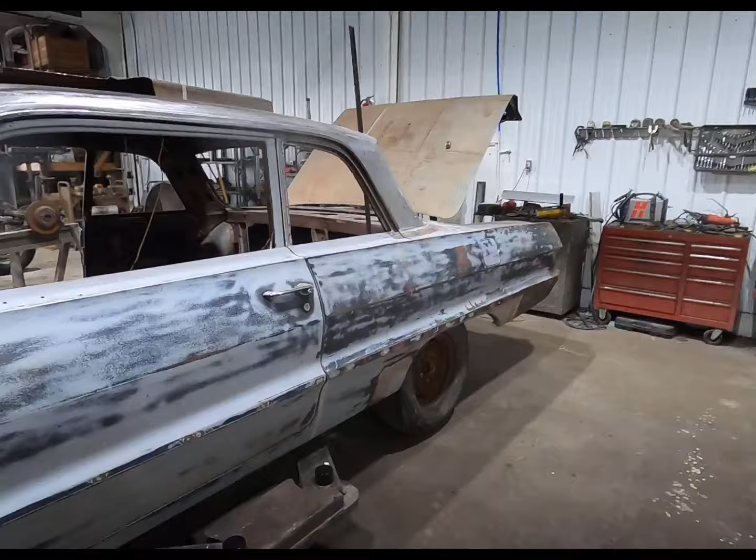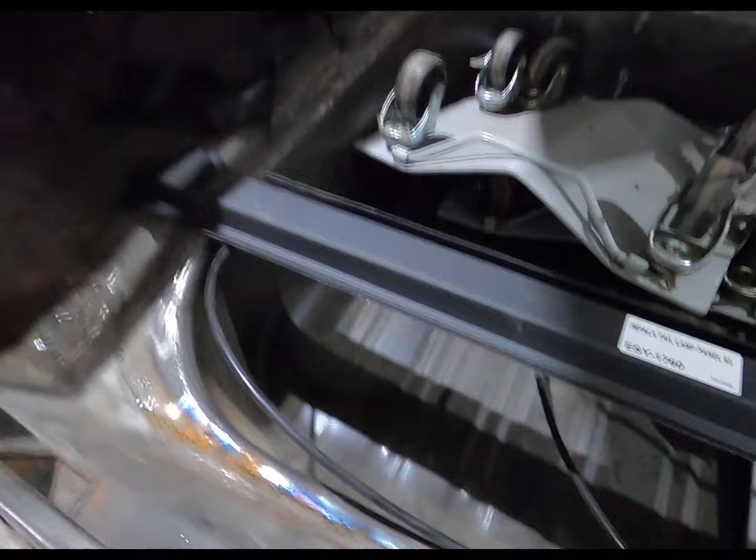I'm gonna get this back panel taken care of. This panel actually don't look that bad, and that's what he bought. It's the other part that's bad, the part it attaches to. So I'm gonna get that out of the way and make a new panel for across there. It's all beat up and does have rust, so it needs replaced, but the worst part is the panel that goes underneath of it.

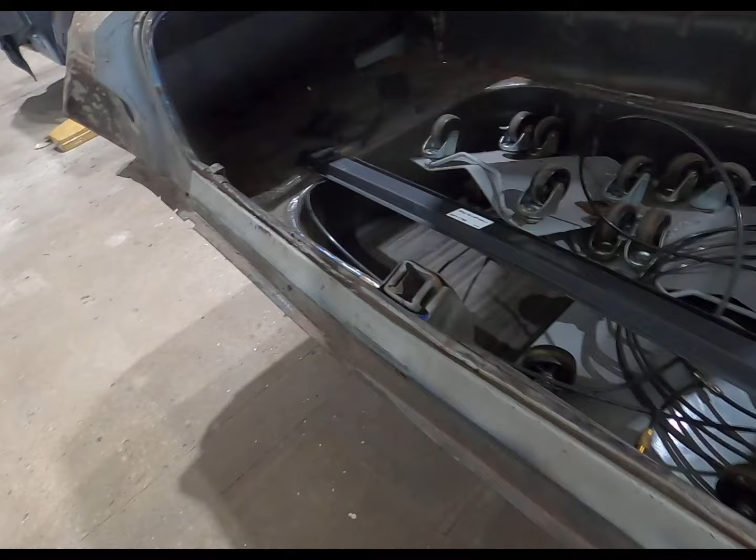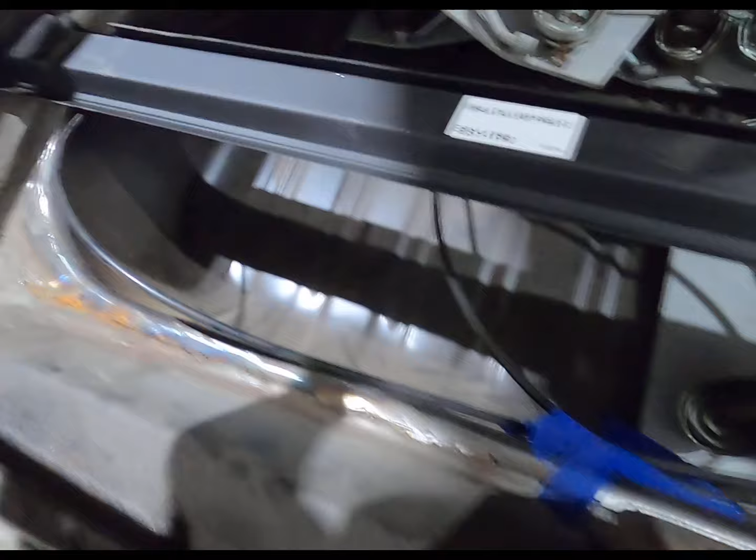I'm gonna get my cutoff wheel and everything set up and start cutting here. First, this panel comes down underneath and it's spot welded on both sides. I'm gonna get those spot welds knocked off and get this out of the way. This ain't attached to the bottom at all, so I'll leave it where it's at. Do the same thing on this side, cut it, get it out of the way, then cut across and get this over so I can see how that panel's made up in there.

All right, I'm going to mark this where I measure, 33 1/4 to this side. That way I can double check it after I go back in.

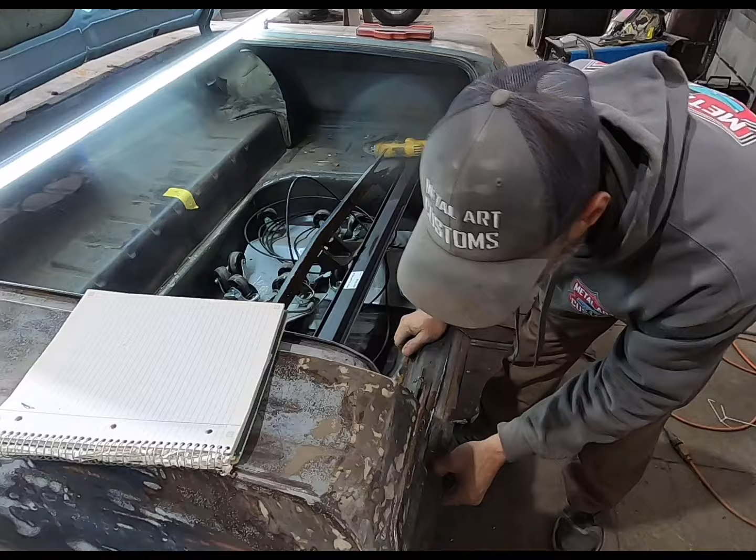All right, let's mark the ends. See, I really don't need to replace all this, it's just right here. So to make it easy, I can cut that loose right there.

To make it easy on me, I can take this out right here and weld across the top. Now what did I do with my pencil? There it is. Okay, right there.

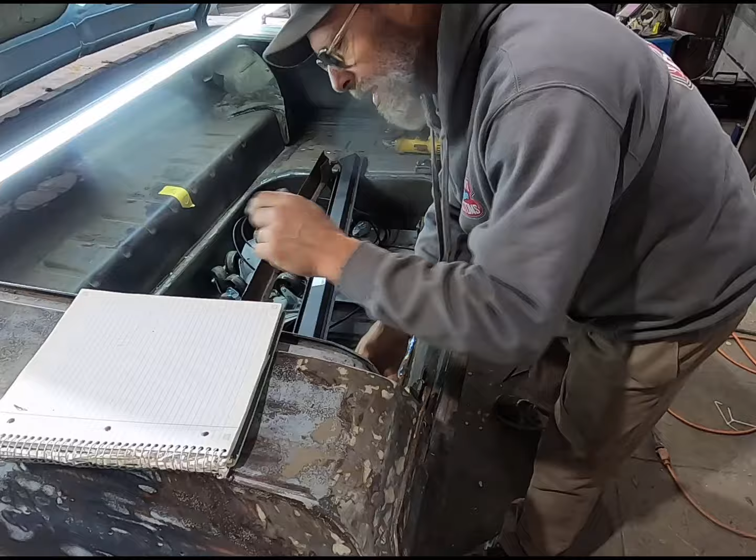If I come up here, right there's the end of my piece I'm replacing. Get this out of the way. I can stay, I don't know, about that far back and just cut all the way across and get this piece out of here.

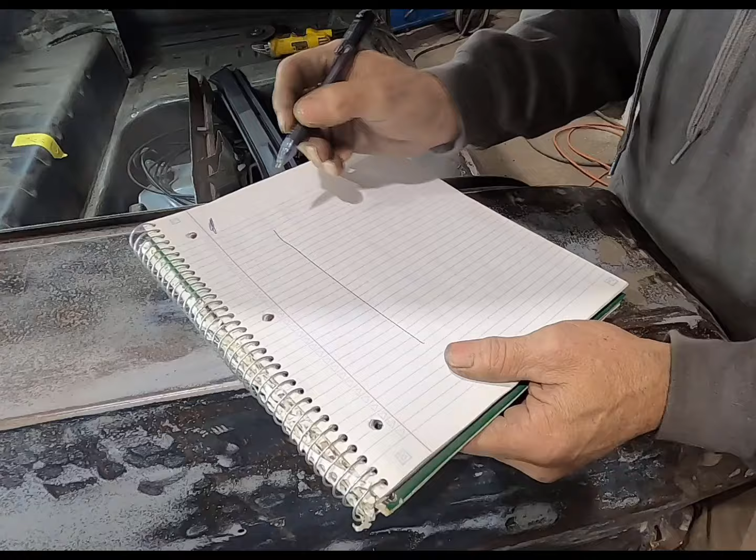But before I do that, I need to get a measurement here and a measurement there. So that piece comes across, taper out. At this end to that bend, I need 1 inch. At this end to that bend, I need 1 3/4.

Okay, and let's see, we got three-eighths. And to come all the way out here, we got 2 inches there. Okay, 2 inches. And then from that cut to that cut, 28 inches.

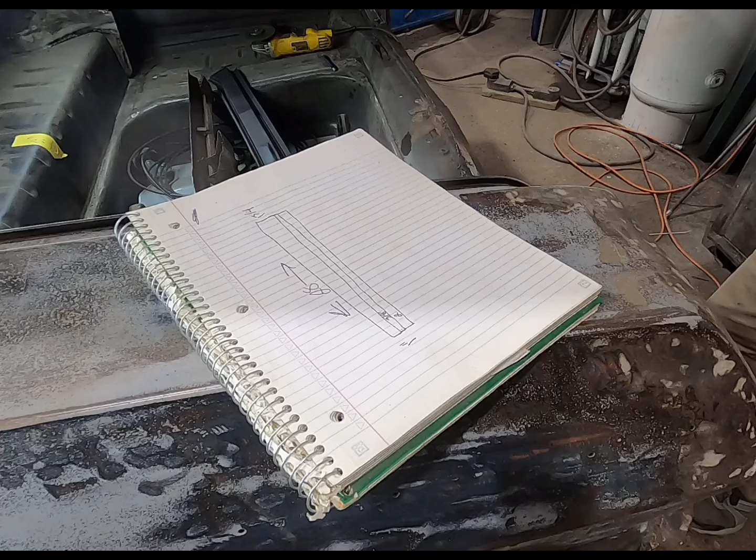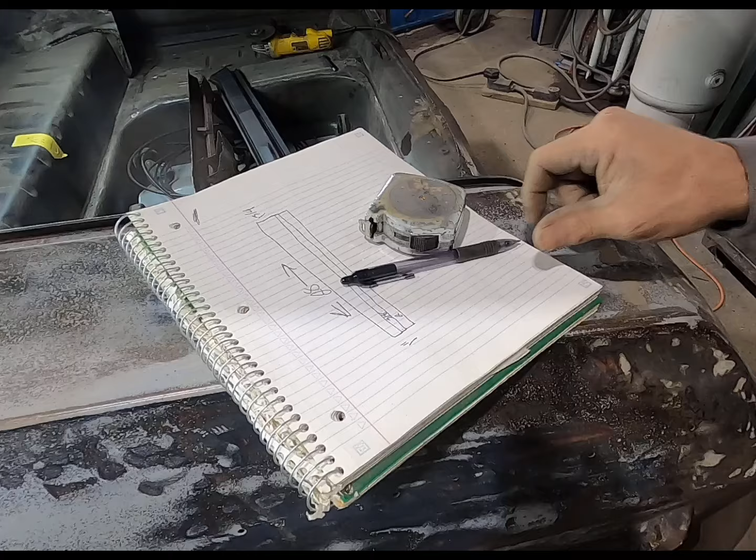All right, I'll get a blank cut out. So my blank on this end, I need 3 3/8. On this end, I need 2, 3, 3 3/4, 4 1/8, by 28.

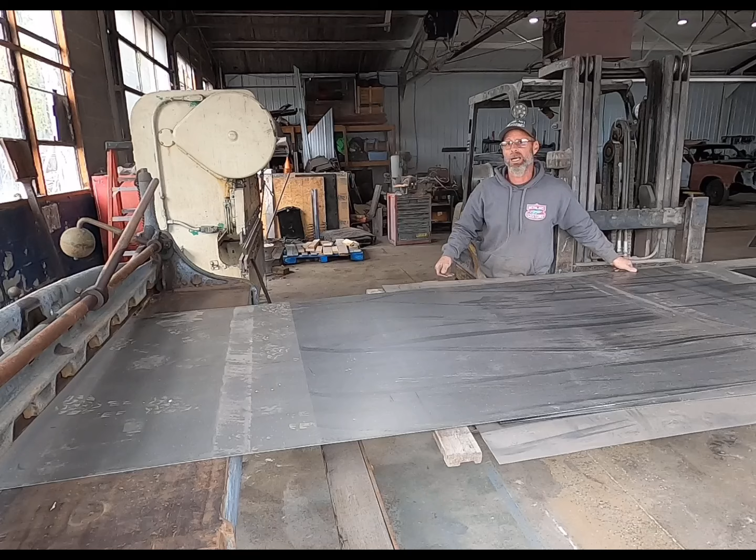Make sure it's flat against the backstop, like so. Lock it down. It might be easier if I stomp it from over there.

I don't like how this pedal tapers and you can only step on it in the middle. I'll probably change that if I don't make it hydraulic. I'll probably make it hydraulic. I'm not up for all that.

Could you imagine doing a lot of labor like that? Yeah, I don't think so, Tim.

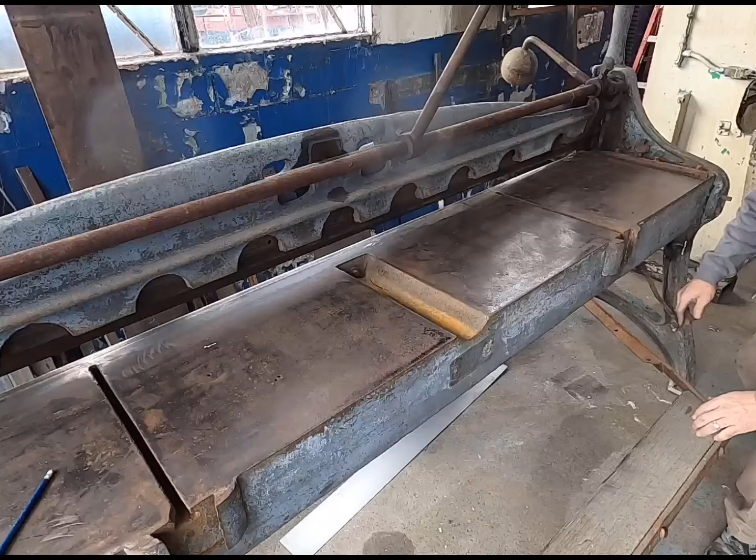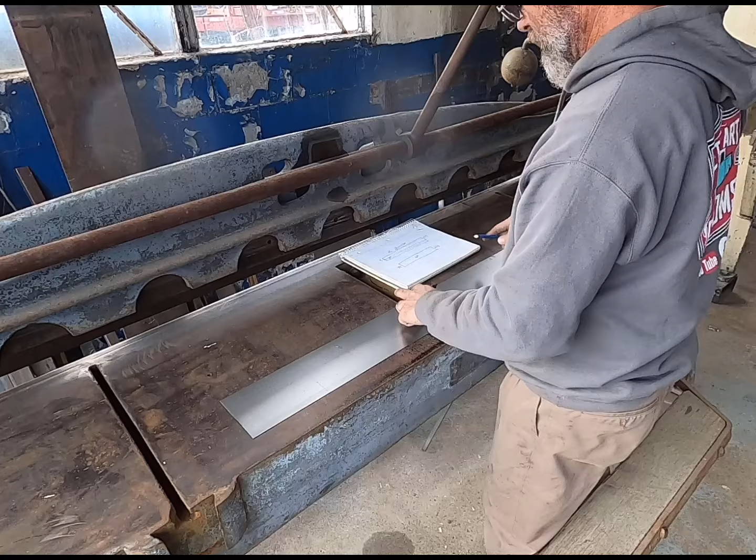Oh man, that did a nice job. All right. Now I need to lay out my bend lines. Okay, so I need 2 inches here.

The next is 3/8, so I flip it 180, and it'll be 2 3/8. Okay, and then I need from that line. Let's see, on this end, this is that end, 1 3/4 from that line. This side is that side, so I need 1 inch over here.

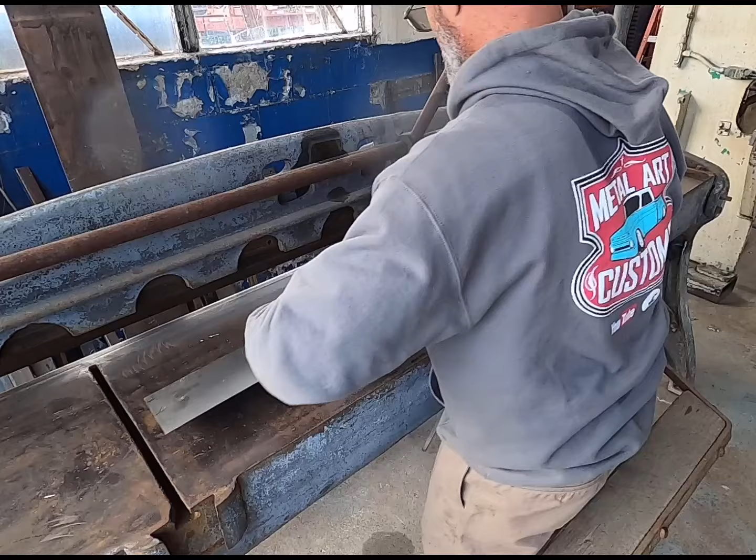I'll set that up in here. Line that up with the blade. Line it up with the blade. Lock it down and stomp. Hey, now. Okay.

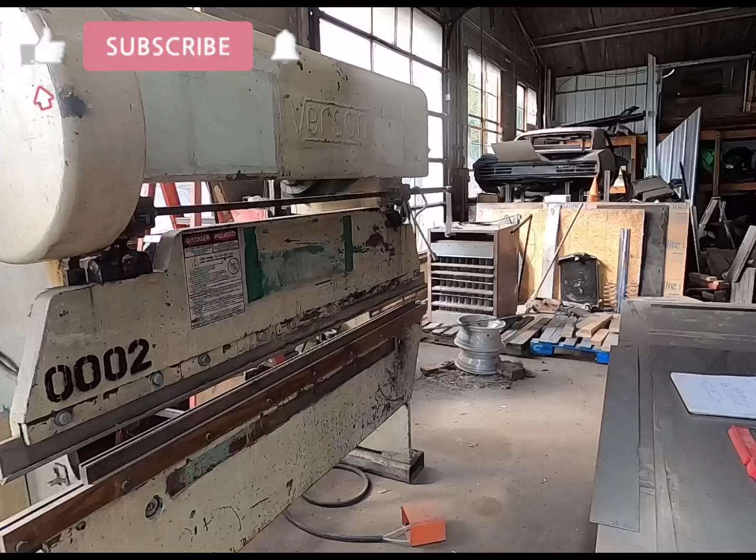Now to set the brake up. I guess I need my air.

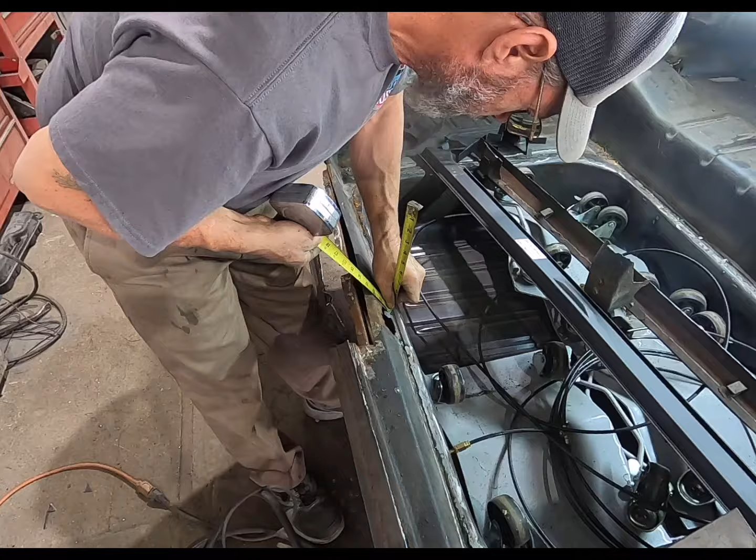All right, this sidebar is not in far enough. So... oh man.

Yes, I will definitely be putting a power backstop in this thing. All right, so the backstop's at 4 3/4. I'm going to move the backstop back. Close enough.

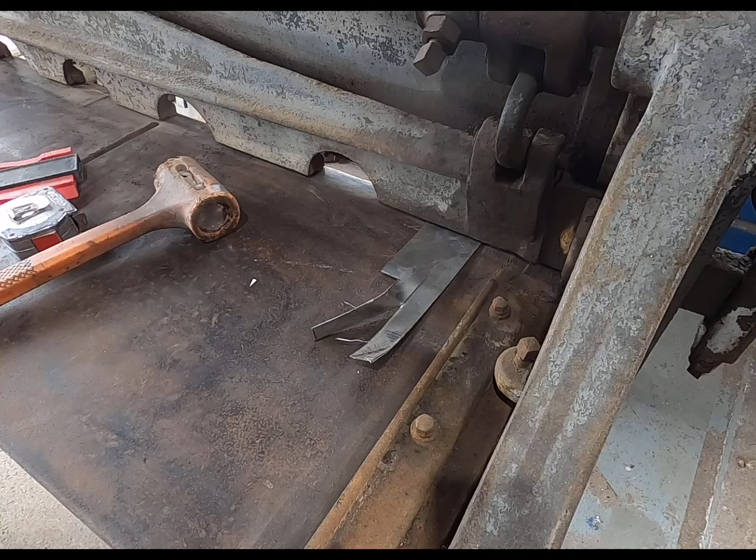All right. Dang it. All right. Now turn the brake back on.

All right, so the first bend is 1/4 inch. That line right there is 1/4 inch.

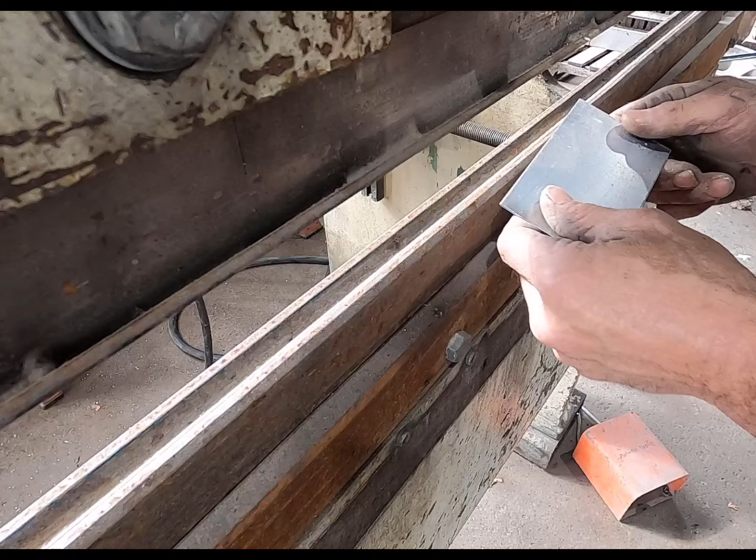Need a little bit more bend. That'll work. I need 2 3/8. Stay.

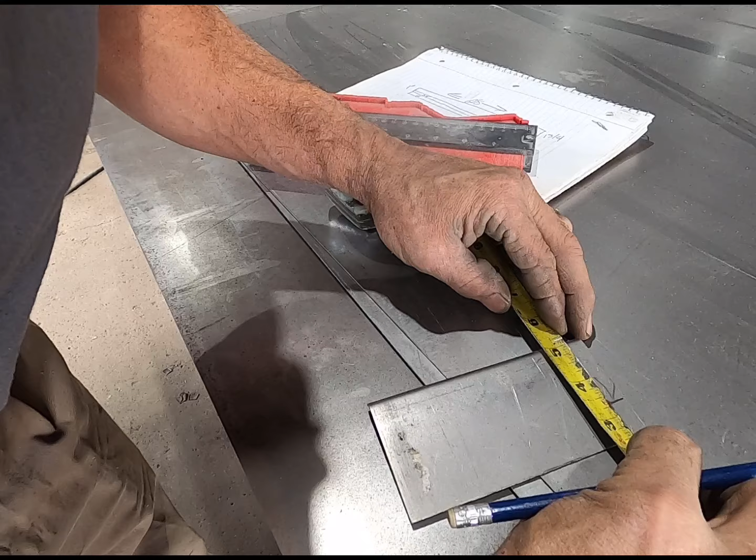Wait a minute, what did I do here? I cut that the wrong way? Oh, that's 1 3/8, I didn't make it big enough. Hold on. All right, I made sure this one was big enough, 2 3/8.

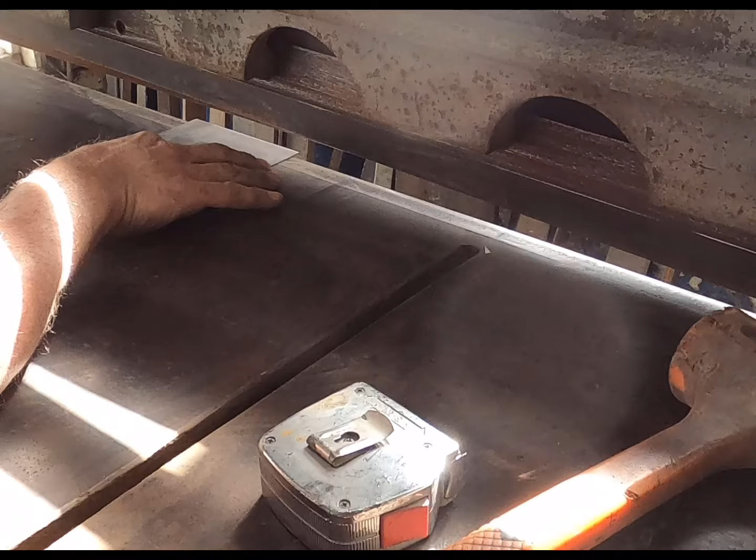Now I'll trim this down. Oh yeah, I like it. That'll work out real nice.

Where are you at? There you are.

Really? Dang it, I gotta make another one. Knock the dang hole in it.

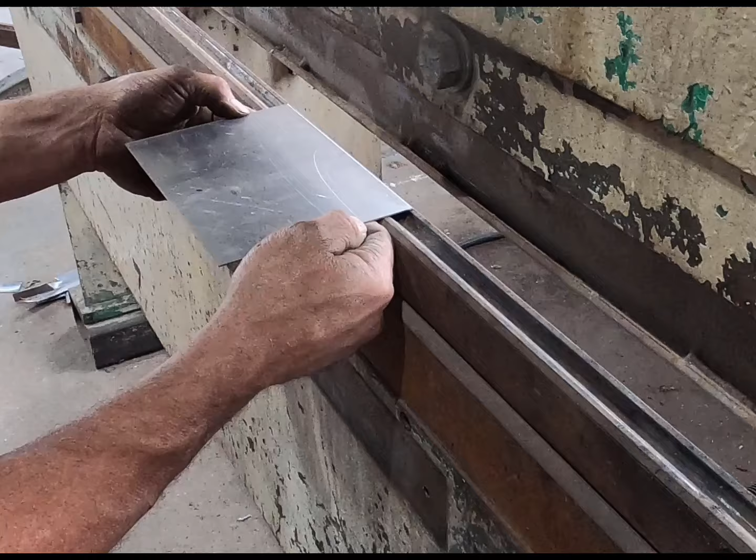Alright, I know the metal's good there and there, so I'll just make it 8 inches long and make another one. I'm gonna make it just a little bit bigger this time though.

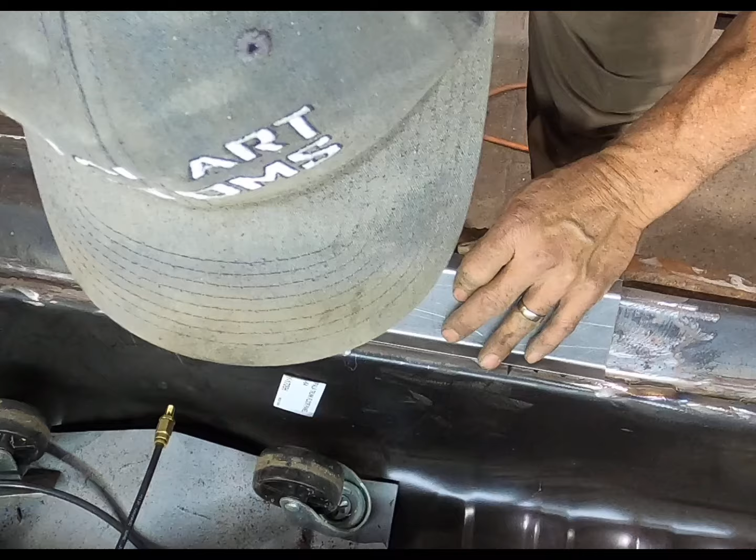That's the lip I wanted to make longer. That won't work so good.

It's Monday. Monday.

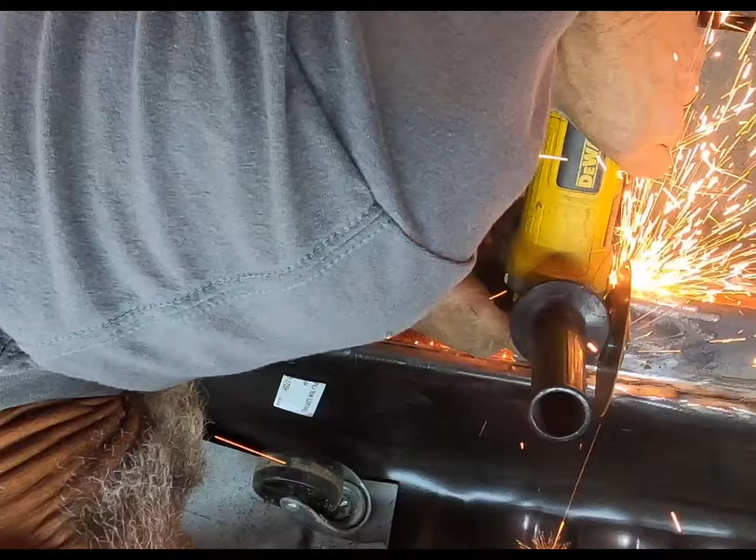All right. Now trim that edge down. Or trim this, nope, because that's 3 layers there. I'll trim this one down.

Because that'll let it drop down into place. That's gonna be fun, hold down won't hold that.

I could just cut it with a cutoff wheel. Can you see what I'm doing here? Okay, let's see. Yeah, that lines up real nice. Awesome.

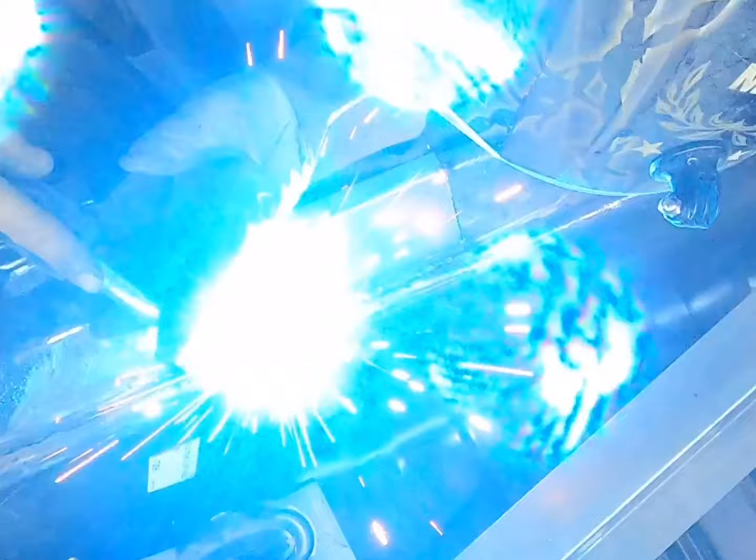Man, that stuff reeks.

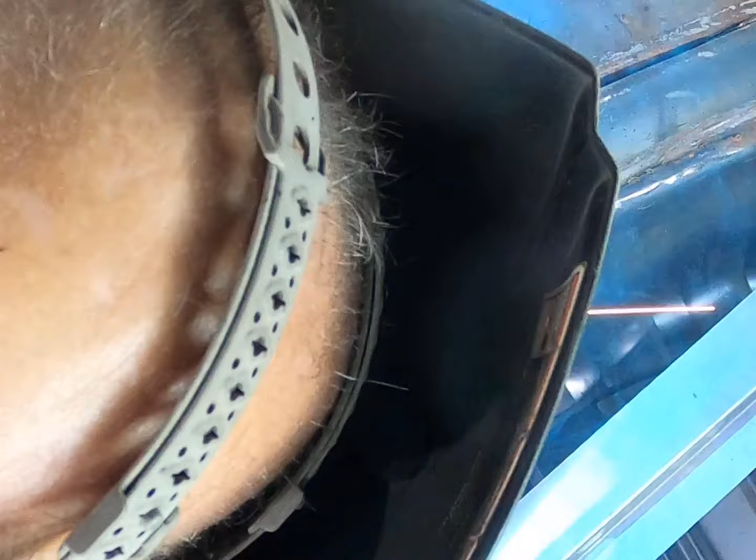Yeah, I think I'd rather stick to undercoating in there. Woo!

We'll weld through primer. Man, that's right.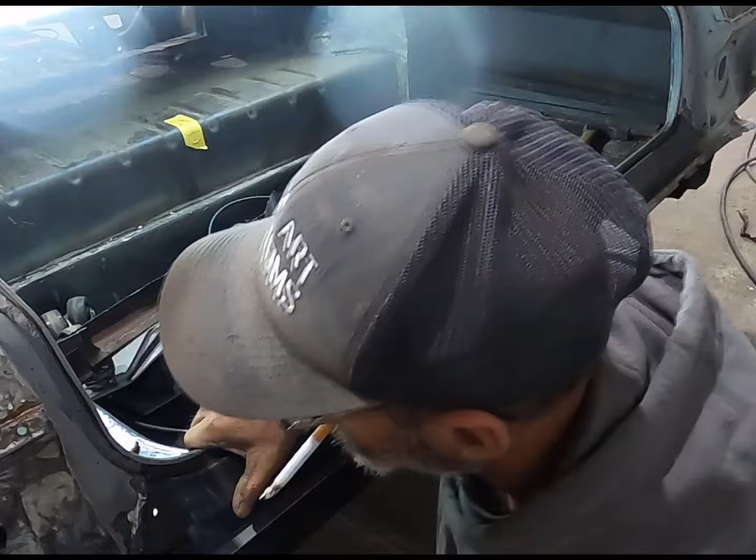So how do I get that behind that? I wonder if I got a notch at. Never done one of these. Well, even if I do that, even if I notch that,

Okay, I see, I got notch that, notch that. Somehow it goes on top of this and behind this. Somehow I gotta get it up in there.

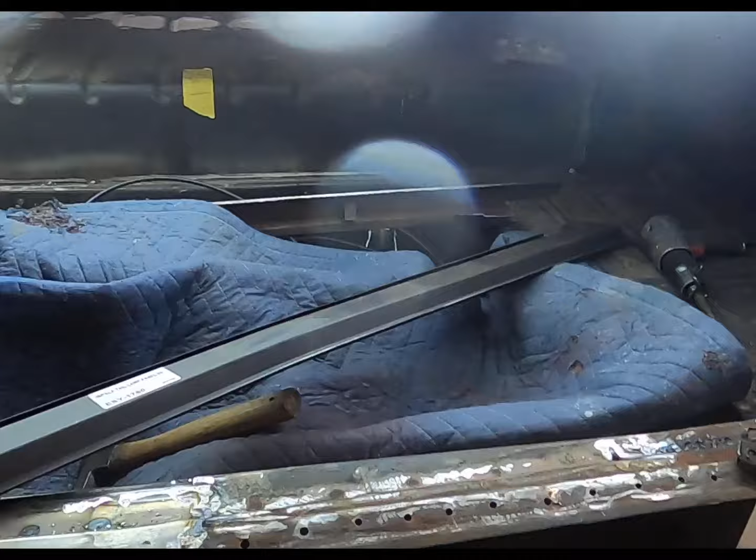I think my best bet is just going to be trim this right there. That way, let me move my ground. That way when this goes up in there like that, I can get it centered and weld that seam.

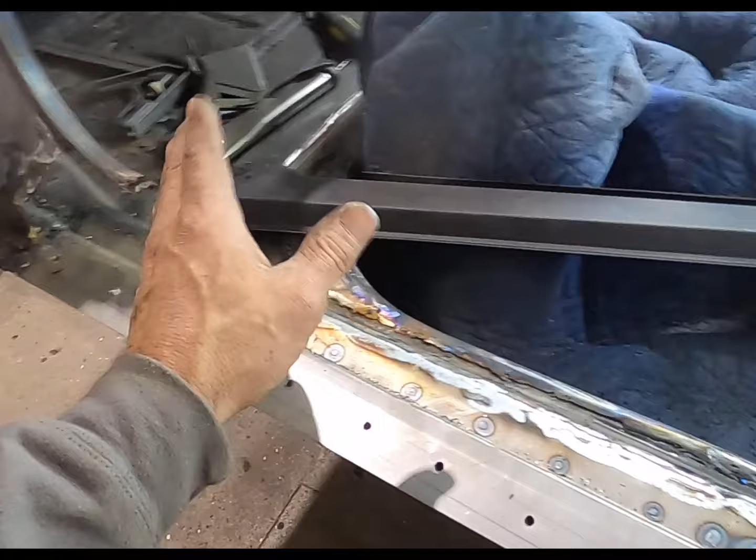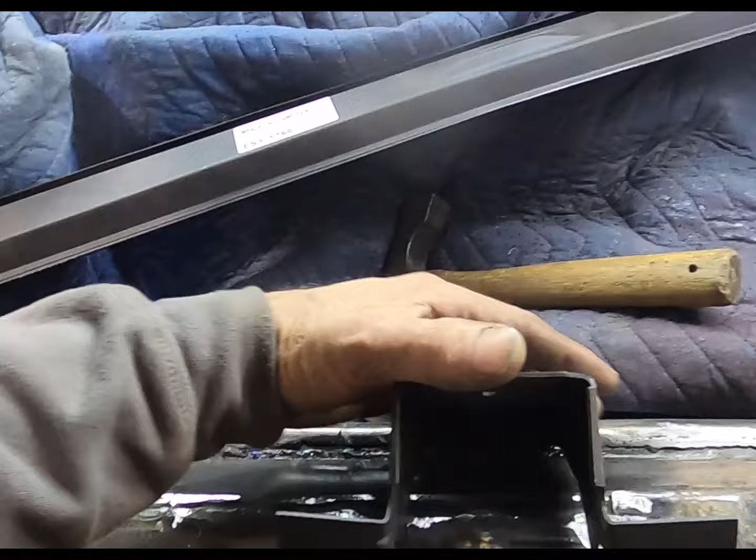I don't want to distort this trying to get it twisted around in place. I think that's going to be my best bet. And then this piece goes right there against this piece, like so.

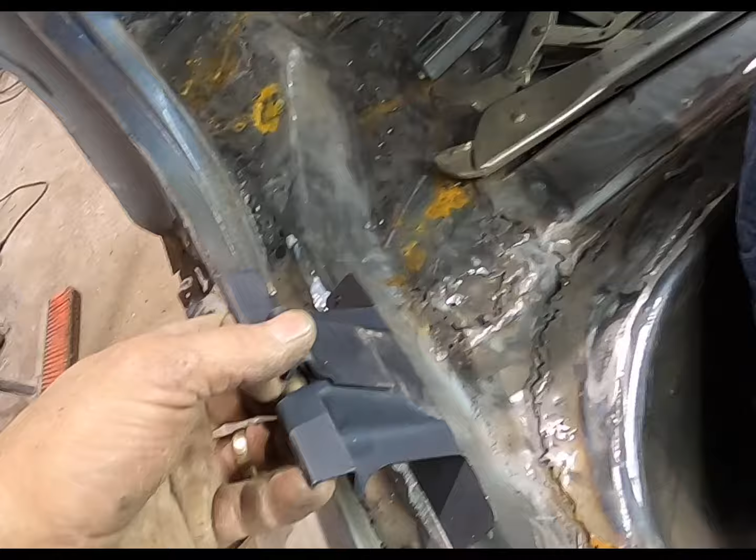These tabs get welded to the back of this. And then these pieces go in here somewhere, something like so.

I'll get that taken care of in the morning, and then I'm going to look at these corners, see if I can't clean some of this up. Plug a lot of these holes.

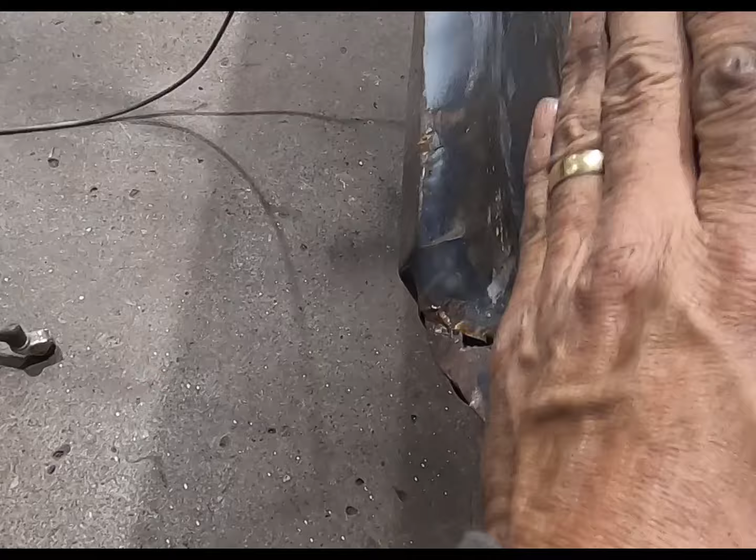These I think are for trim, but up here, those are from somebody straightening on both sides.

I don't know, I ought to be able to whip this part out tomorrow. And then I got some grinding, go in here and clean some of this up. The trunk will pretty much be ready.

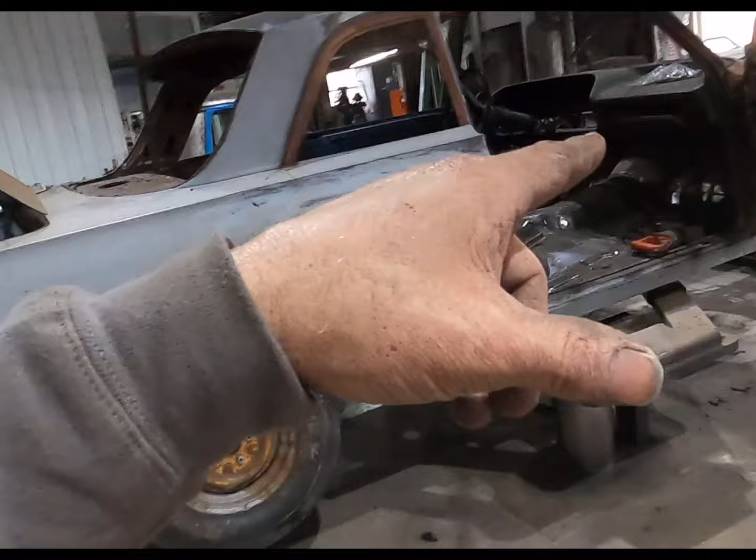And then I gotta raise it up and do all the underneath stuff, which there ain't a whole lot. Weld them 2 brackets there, and then while we had it up Saturday, we noticed 2 more up front that need welded. Get those welded. Do a little bit of work on the corners there.

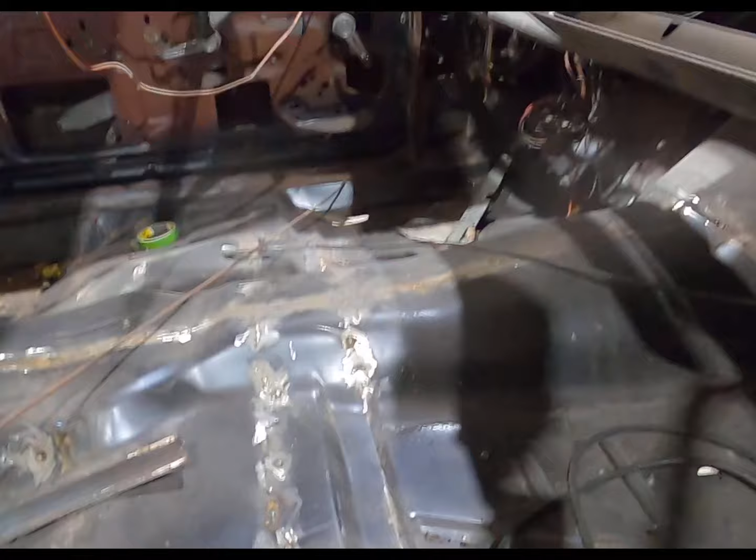And I believe all this is done out here. I got that hole there to plug, that hole there to plug. Weld those 2 pieces.

And that patch there. As far as I know on the body, that'll be about it.

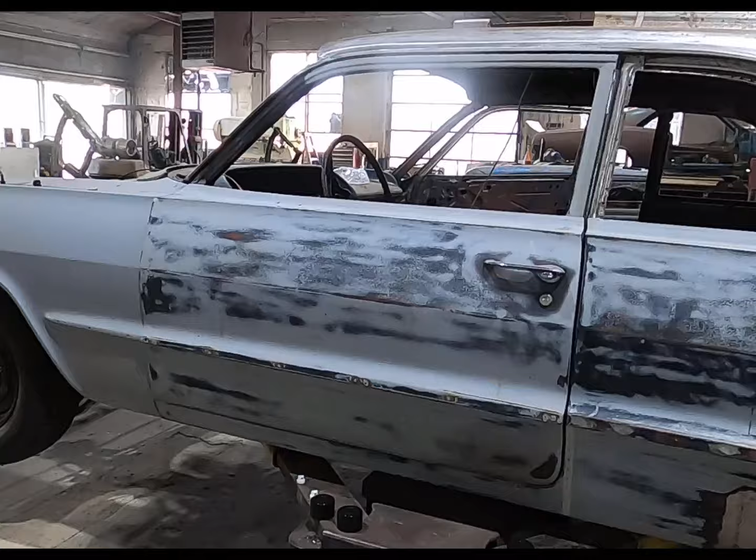And then I got a little bit on the doors to do. And he said he found somebody with the center section, so when that comes in, we'll do that.

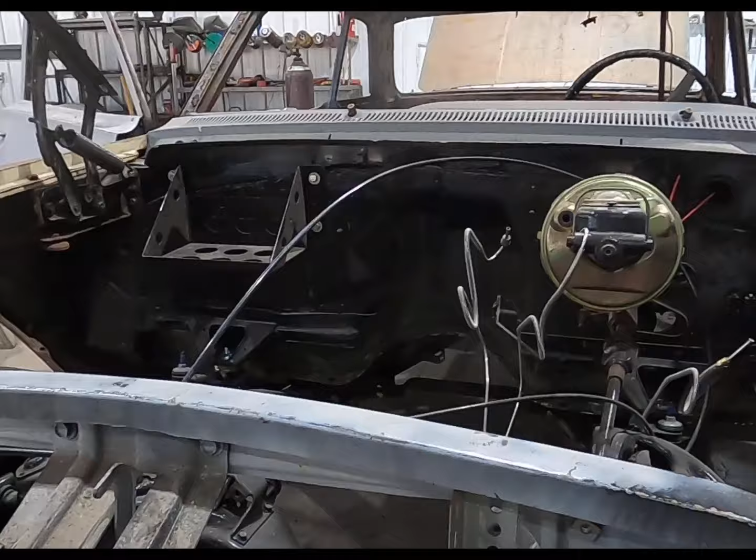I'm trying to get all the fab done before I really start the Bondo work and stuff like that. I think he has ordered a firewall filler kit, so I'll have to get all that stripped off there and get that all welded in, which I got to pull the front end off to do that, front fenders.

That ain't no big deal. They got to come off anyways.

And Rob brought this in today. It's got a couple small areas, but nothing major. It looks like it's in really good shape.

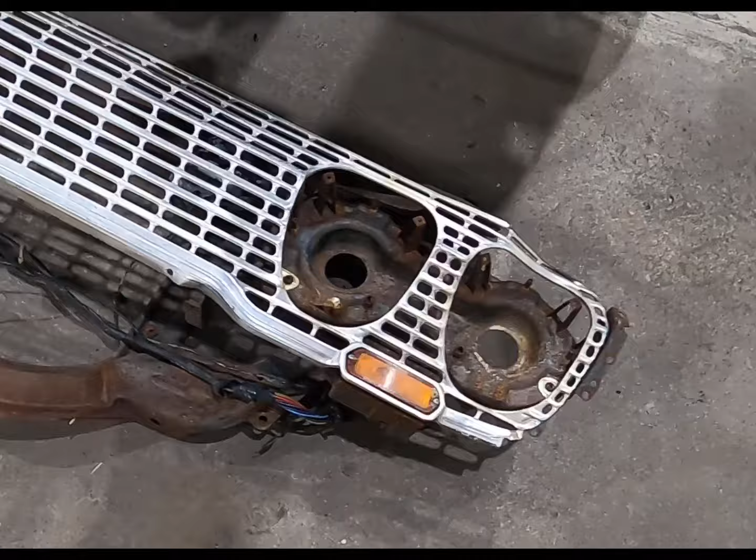I don't know. One day at a time, I guess.